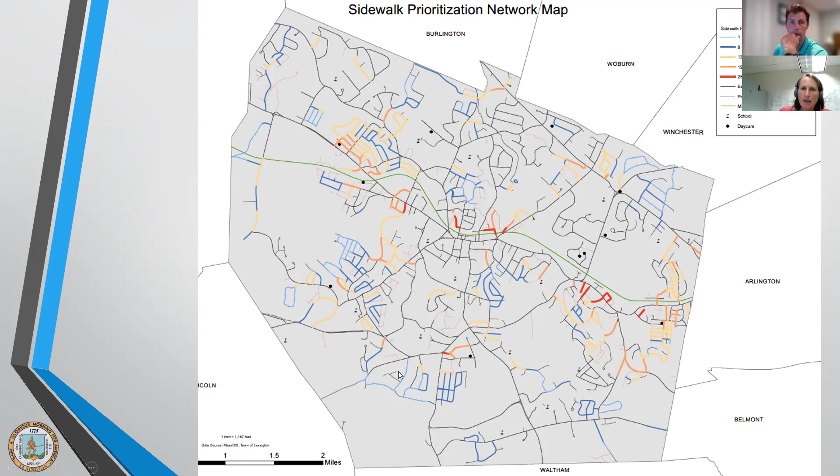And then if we're going to think about whether we're really going to build a sidewalk, there's a lot of consideration. We look at the connectivity. Does this proposed sidewalk fill in gaps in our sidewalk network? Will it enhance or extend our overall sidewalk network? But also, will the sidewalk get people where they want to go?

We look at the crash history of the roadway. We also look at the roadway characteristics—the widths, the grades, sight lines—and whether there's enough room to fit the sidewalk in. Would takings be needed, easements, that sort of thing? And environmental factors—will there be impacts to wetlands? Is there ledge in the area? Is there substantial fill or cutting needed?

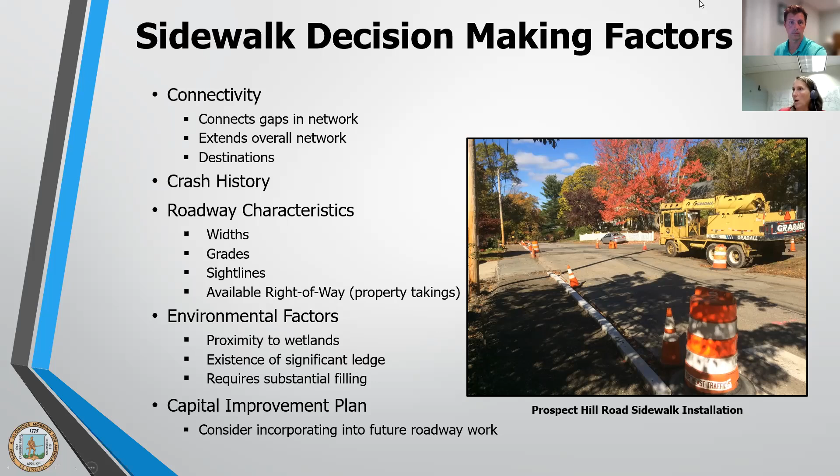Ross is going to tell more of the specifics of Cedar Street. Okay, here's some basic facts about Cedar Street, which you probably all know, but let's run through it.

We're talking about Pine Meadows Golf Course to Mass Ave. That's the full stretch, a little under a mile, about 0.8 miles. The pavement width varies considerably, from 18-19 feet up to a few wide points at 30 feet. The right-of-way width, the area the town owns, is about 25 to 40 feet, depending on where you are, and it varies a lot as well.

It's bounded by 73 parcels, 73 different abutters along this route. Anybody who's been out there knows it's well lined by trees and landscaping and some retaining walls and landscape features. We also have 11 intersections along this stretch.

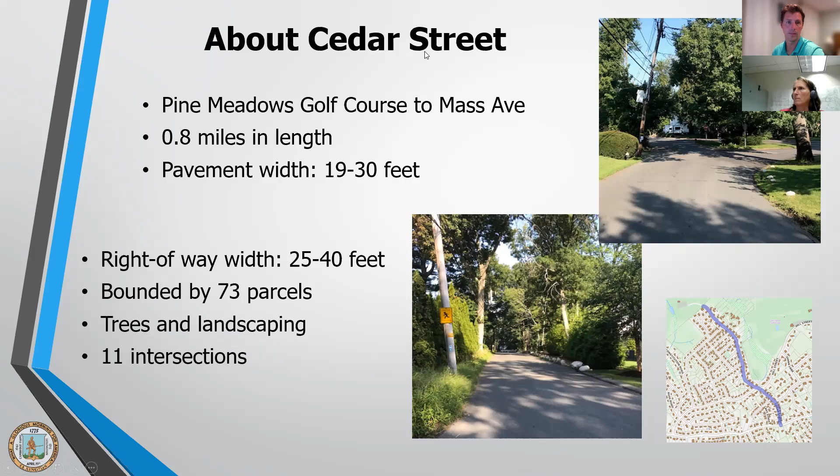Next slide. Some more traffic related notes. There's been 6 reported crashes that the police have on file. You can see in the graphic, the 6 crashes are between 2010 and 2021.

Speeds: we did a speed study last month, and there's an average speed of right around 20. The 85th percentile, which is usually what designers look at, that's the speed the majority of cars are going at or under, is 24, so right around the town speed limit. The maximum, there was one person doing 38 miles an hour through there.

This information is interesting because I know a lot of people feel like a lot of cars are speeding out there, but you start to get just a few doing that 30 to 38 speed, and it feels like there's a lot more people speeding. But the speeds actually were relatively decent out there.

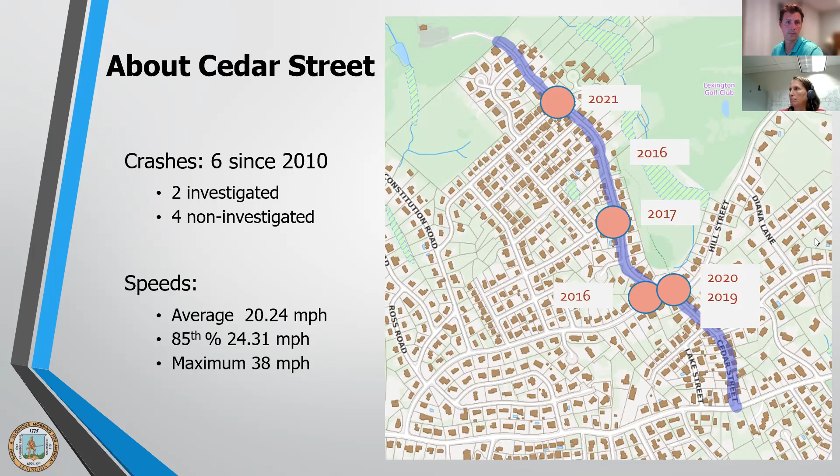Next slide. So this is the sidewalk network that we have now. In the graphic, you have existing sidewalks in the orange color on the map. We just put one in going up Hill Street, and there's one on Paul Revere Road, and of course Mass Ave in the lower corner. Then there's a few other ones at the newer developments of Martingale and Winding.

This sidewalk, if it were to go forward, would connect the golf course to Mass Ave. You have connections to the Poor Farm Conservation Area, and you'd be able to get to Mass Ave with reasonable proximity to Hastings Park and the high school. There are also school bus routes that go through here, and I'm sure we've all seen those school buses and the kids waiting for them in the mornings.

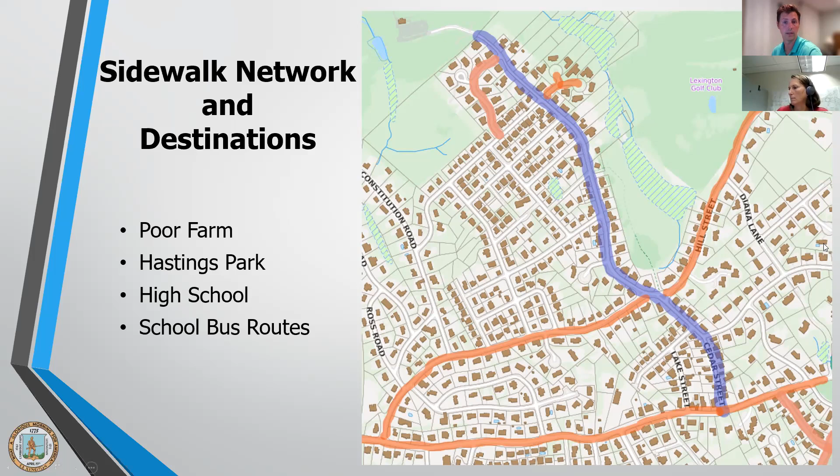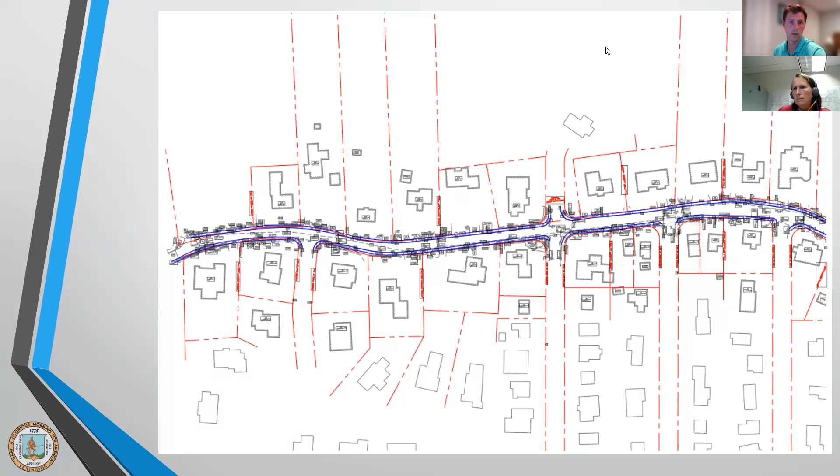Next slide. Oh, so yeah, here's our concept plans. We threw it in as a slide, but I'm going to switch over to my screen and we'll take a closer look. This is going to be a bit of an overview. All right, I hope you can see my PDF I got up here.

What we're looking at is right now you have the golf course on the left side of the screen, and as you head to the right, that would be heading towards Mass Ave. We're going to scroll through it briefly.

What I wanted to show you is the impacts, some sample properties we might look at and how we evaluate impacts. We are only looking to do a sidewalk on one side if this project moves forward, not two sidewalks, but part of this process is to see which side of the road would be better suited. That's why you see the blue lines on each side.

The blue lines represent a 5-foot wide sidewalk set right at the edge of the road. Typically we like to include a 3-foot grass strip, but this road is so narrow that I don't think that's feasible. The red lines are the property lines, so we're really trying to keep our sidewalks inside those two red lines that run along the street.

So this first section, I'm just going to zoom in on a property and we'll take a look at kind of what we look at in the office as designers.

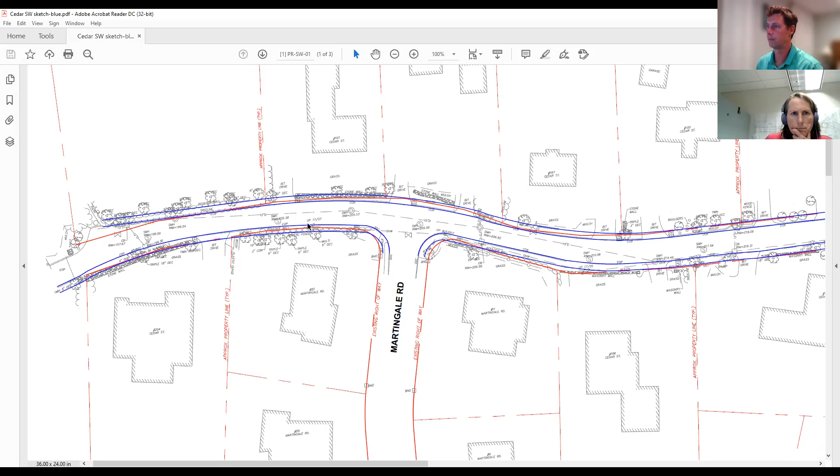So just as a sample property to look at, we've got the two blue lines. This is 22 Martingale. We have the back side where the sidewalk would actually protrude outside the town's right of way by a good 3 feet at the utility pole.

There's a wall that we'd look at, see what type it is in the field, see if it's realistic to move it back. Is it a landscaping wall? Is it holding up the yard?

And then there's a utility pole right in the center of this property. Do we have enough clearance to go behind it? We definitely want to keep the town's minimum that we try and go with, about 52 inches.

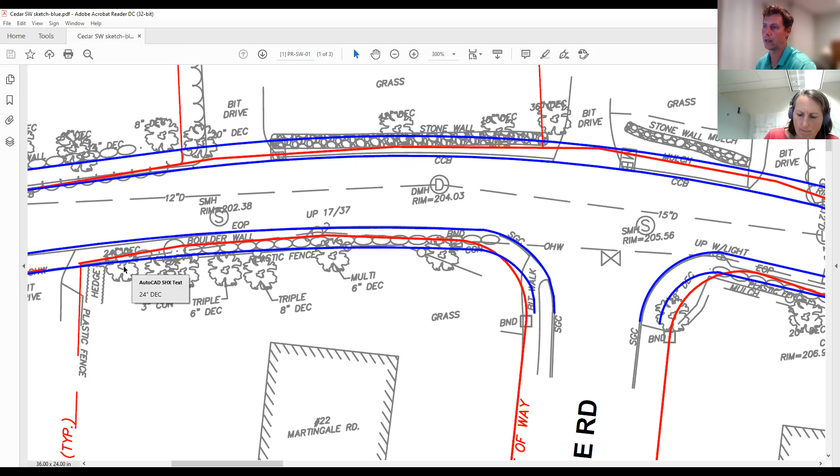That gives plenty of space for the sidewalk plow or a snow blower, strollers, that type of stuff. Something to keep in mind as we go across trees, like there's a 24-inch tree right on the corner of this property on the left side. While it looks like the center of the tree may be outside the sidewalk, just digging in the area to get a good sidewalk base, we might be damaging the roots. So trees right along the backside might have to be removed if that's the case.

I'll zoom out a little bit. I'm just going to kind of scroll through this quick. Like I said, 73 properties. It's a little tough to look at every single one over the course of the meeting.

But just to give you an idea of what we're looking at and how narrow some parts of these roads are, you can see at 187, just where the road falls within the right of way, almost the entire sidewalk would have to be on somebody's private property where we'd need easements or takings. So this shows the block from Martingale to Freemont.

I'll give you a second to look at that. I apologize if I scroll right by your property and you wanted to see more detail. These plans are available online and we're happy to discuss them anytime.

So here's Freemont to Homestead. This area, something we might say is, oh, there's actually room within the right of way to put the sidewalk on that even house number side for this one block.

And while we're talking about sides, something we want to avoid, we wouldn't want to do a sidewalk on the even number side for one block and then switch it to the odd number side for another block and then switch it back. Every time we have to do a crosswalk across Cedar Street, it's one more conflict point, and we try to stay away from those if we can.

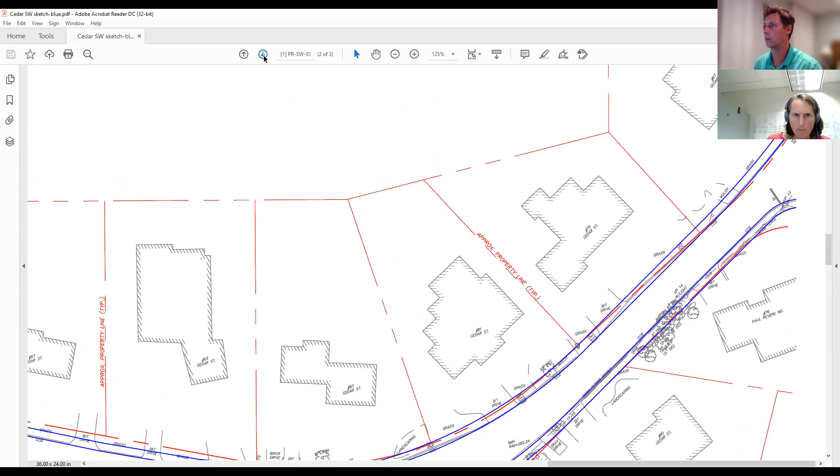All right, here is the Paul Revere and the Hill Street intersection. Depending on which side, we would either tie right into the new Hill Street sidewalk or into the crosswalk to get across to Hill Street.

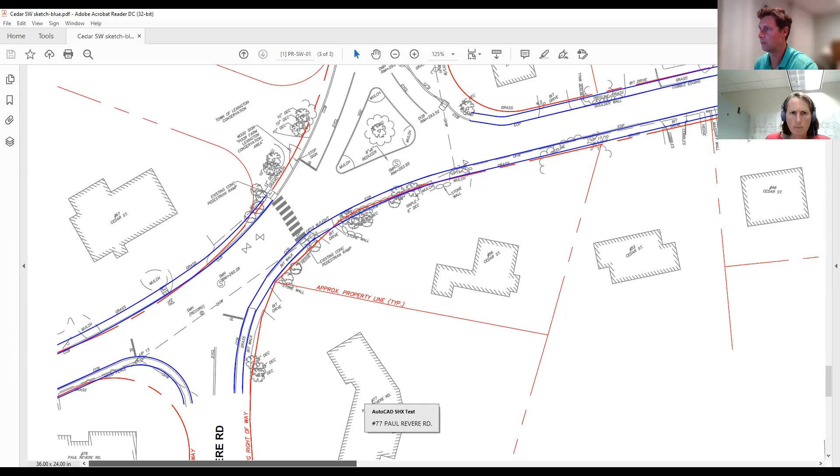And as we go along Cedar, closer to the Mass Ave section, you can see that it's fairly consistent width. There are a few interesting pinch points, like this one between 32 Cedar and 28 Cedar, where the right of way just kind of pinches in at one little point.

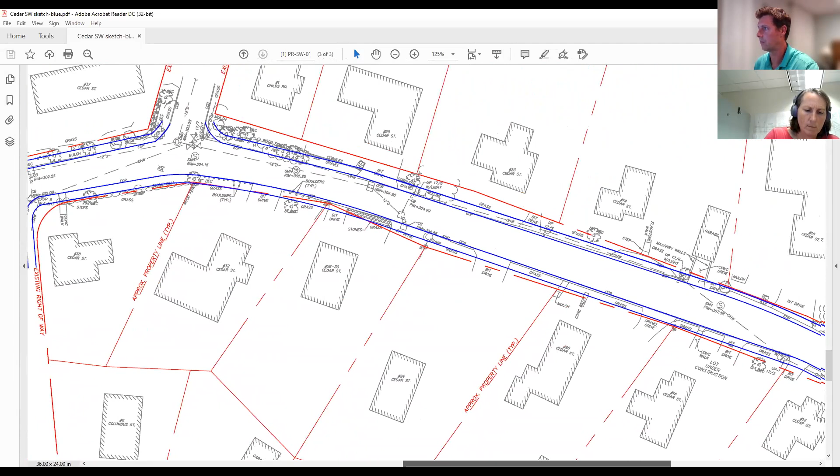And then finally, as we get down to Mass Ave, on the even number side, we have one piece of sidewalk along the final property on the even side, and along the odd side, there's this final house that is just off the right of way.

So there's kind of an overview of what we're looking at while we take a look at these plans and as we walk through the field and make notes to ourselves.

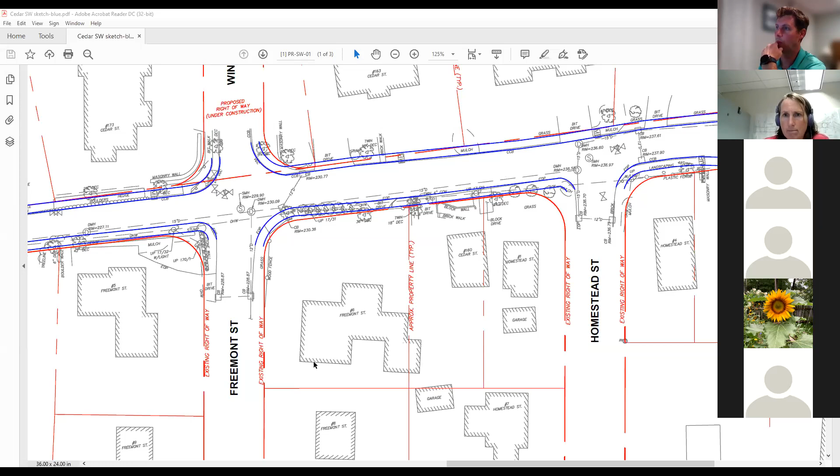Another question was, does the preliminary review suggest whether odd or even is more likely the side to use? I've got to be honest, it's a pretty tough question if we're segmenting it off. For the Mass Ave to Hill section, I was thinking the even side, just because that's where that first section of sidewalk is. But it really does flip back and forth about which would be more beneficial in different areas—it's really tough to tell. For now, I'd say the even side for that section, Mass Ave to Hill, and after that we need to study it more and see what people feel about it.

Then we have another question—we kind of already talked about this, but if a partial plan is considered, do you see logical stopping points, such as Mass Ave to Hill Street or someplace further down Cedar Street? They are suggesting where dropping pedestrians into the street won't be a problem, and that the Hill Street and Cedar Street intersection is dangerous enough not to end the sidewalk right there.

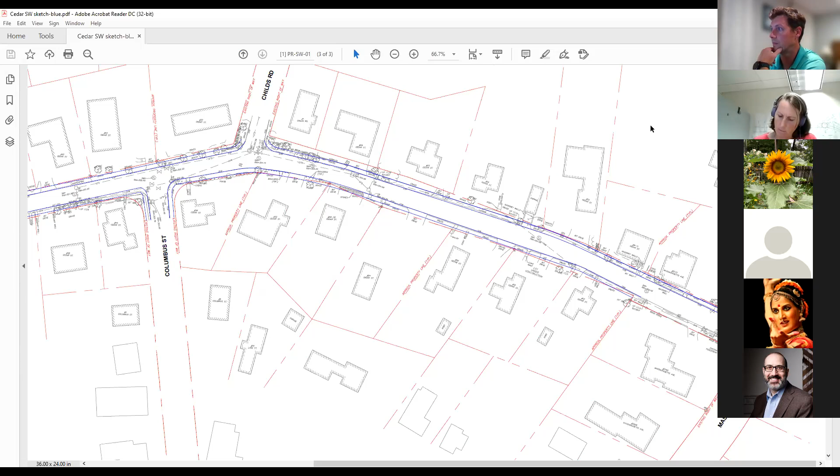Hopefully that's something being taken into account. With our kids now going to Hastings and Diamond, we're watching them cross the streets, even though they're only a couple houses away from the existing sidewalk, because there really are very difficult sight lines coming from there. But I appreciate the work and hope that would be considered. We'll take the sidewalk on odd numbers or even numbers, whatever you recommend. We would give up our front yard for it if that's what was asked.

I'm looking for... there was a question in there about timeline for decisions.

So to touch on something we talked about in the slides, TSG is going to meet, I believe, on Friday morning to do a final discussion of this, take any feedback we have, and decide whether we want to put a recommendation in towards the select board and the budgeting committee. They'll do their work on it after that.

And then town meeting votes in April, March or April, depending when it is. So you won't hear much from us as far as design or engineering. There won't be much between now and then.

Once we have clear direction and funds available, then we'll start canvassing the neighborhood as far as what our limits are, knocking on doors, planning meetings. It's probably going to be a lot of work next fall as far as design and finalizing those little details.

Generally, just so everyone's aware, when town meeting votes to approve funding in April, in the spring, the funding becomes available in July. But because you don't know ahead of time, it's very hard to program the work for that summer. So a lot of the design work happens the following winter in order to construct the following year.

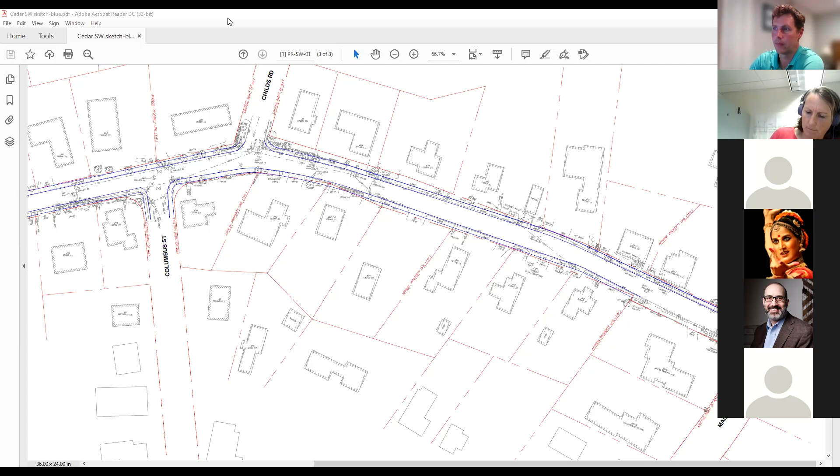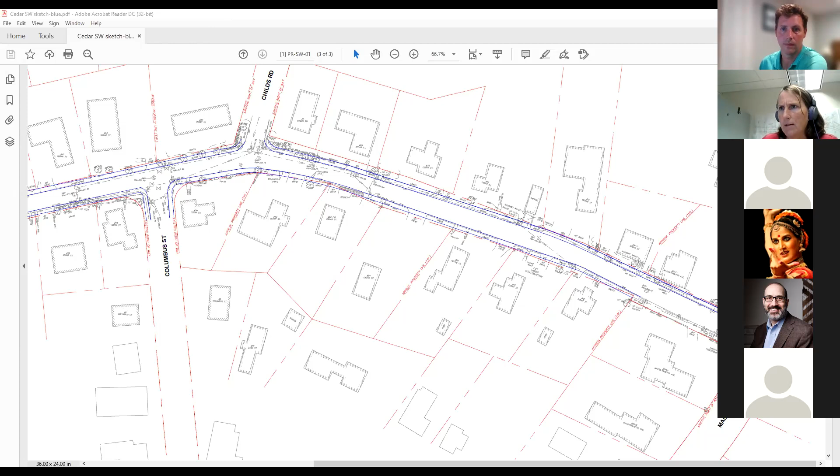Okay, yeah, thank you. You're welcome. Thanks again for all your work. I think we have- there was another hand raised. There is Jesse. Hi, is that audible? Yes, we can hear you. Okay, great.

Thanks so much. I appreciate the suggestion just made about contextualizing, but I want to add that I've lived on Hamblin Street and now live on Cedar Street since my kids were like 2 and 3 years old, and they're both now graduated from college, so at least 23 years or so. And Hill Street is really helpful to let older kids walk on the sidewalk, even over to Diamond.

But we have a lot of small lots that were built after World War II, little small person lots, and a lot of kids. It has been consistently unsafe for kids to get from closer down by the town golf course just to Hastings. So we had years when Judy Crocker was organizing the walking school bus, I don't know what it's called in the schools now, with parents trying to cooperate and walk together, because you couldn't do what they would have done in the 40s and just put your kid out the door and say go to school, because on Hill Street people just drive too fast.

So I agree with Bridger, if you can put it in context so that everyone in the community understands, but people are still stuck here. The road is narrow and cars drive too fast.

I'm wondering, while we wait, maybe it takes a year if you decide to do this, and however you do it, if there are less expensive ways, I think this neighborhood would be very open to any attention you can give us. We're not trying to be demanding and unreasonable, but there are a lot of little kids and frankly people my age and older and dog walkers who have to walk down Cedar Street to get out of the neighborhood, and cars really do drive right smack in the middle of the road in both directions.

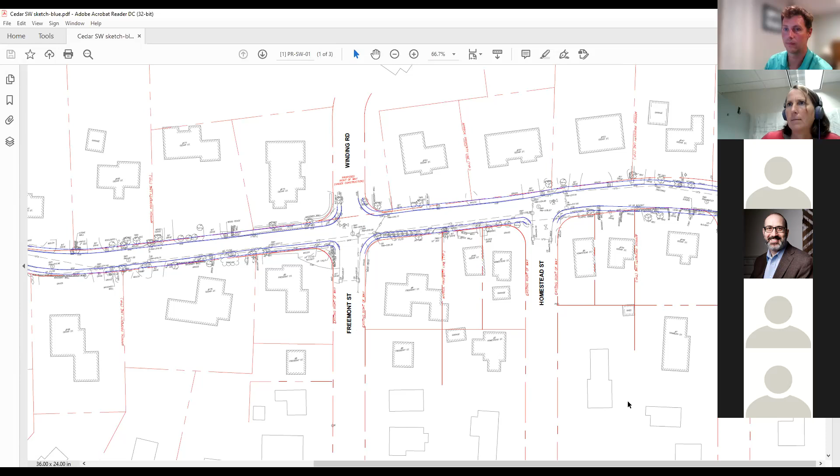Let's see. Justine. Yeah, sorry, I'm speaking up, but I just wanted to highlight what Jesse was saying about the cost benefit.

We have not lived here as long as Jesse, but our son is severely disabled. There are a lot of other kids in the neighborhood that have disabilities that make walking on a street that's windy and doesn't have a sidewalk inaccessible for them. We do, but we hold his hand really tight the whole time.

And I think it's really important, looking at the cost benefit, to really walk down the street and see how many people are out, and honestly how many more people would be walking down the street if there were a safe way to do so. I'd walk down it all the time, just like now I walk down Hill Street, but I wouldn't have before without a sidewalk. It's a real pathway for people from the Reed Street neighborhood to come to this neighborhood, for us to use all of the conservation, and people from inside and outside the neighborhood do that.

So I think it's important to make the decision, as Ross was saying, on if the sidewalk is warranted, without focusing too much on the budget. Is this a street that needs a sidewalk, period? I think it does. I don't think the calming strategies would do enough. And if it's not in the budget, or if the other things are from the same budget, then that's a different question. But that's just my two cents on that piece.